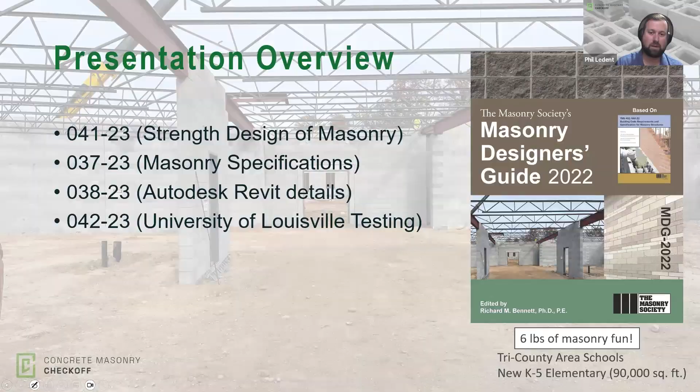I thought we'd go through the Region 3 proposals first, then talk about our national proposal, which was funding research at the University of Louisville. Starting with Region 3, I wanted to start with 0-41, our strength design of masonry proposal. The original scope included developing a new presentation specifically on strength design of masonry for the 2024 annual SEAMi conference, which is our Structural Engineers Association of Michigan. We also helped fund another presentation developed by Davenport Masonry, one of our larger mason contractors here in Michigan, on constructability of CMU projects, which they also gave at that conference.

After we got the ball rolling on this, the scope expanded. Through work with Mark Wilhelms, we were able to go down to the Structural Engineers Association of Kansas and Missouri, SEAKM, and give this presentation there, as well as at the Minnesota Structural Engineers Association. We have an upcoming one next week with the National Council of Structural Engineers Association, NCSEA, and I believe they have about 180 structural engineering companies already registered for that one next Wednesday. If you're interested, you can go to NCSEA's website and register.

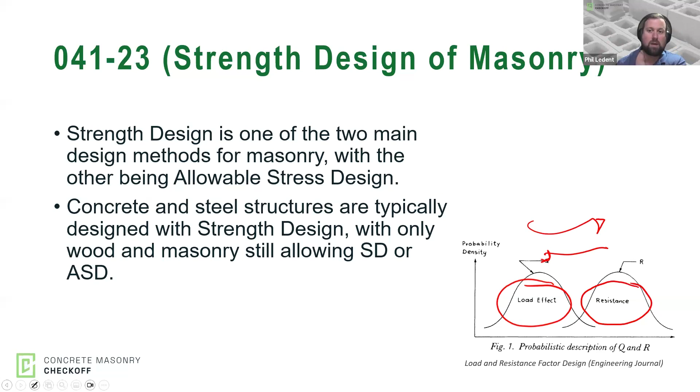Some of the engineering decisions being made are really causing masonry to be a lot more expensive than it needs to be. Unfortunately, the impact is we're seeing school districts, architects, and engineers that historically have used masonry turn to other building materials because of the perception that masonry is too expensive. So what we're really trying to do is educate people on how to efficiently design with masonry so we can be as cost competitive as we can be.

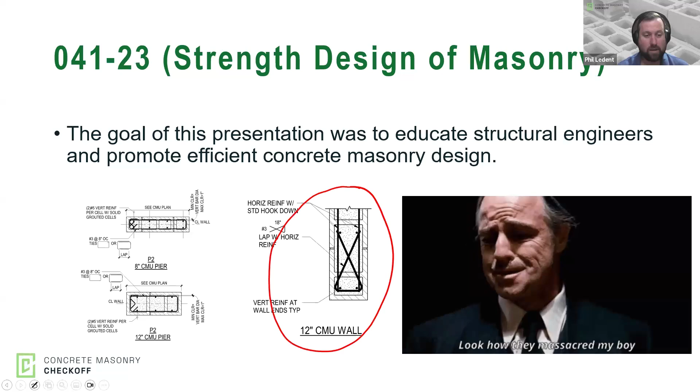Some of these details are more common in West Coast areas or areas that have a higher earthquake design load. But in Michigan and in most of our areas in Region 3, these aren't necessary and do nothing but add cost and schedule to the projects.

So we have to be careful about how we're designing and detailing masonry buildings in that area of the country. But Michigan, Minnesota, Wisconsin, Iowa - we're in a pretty low seismic zone up here, and we can take advantage of that to design economical masonry structures throughout most of our region.

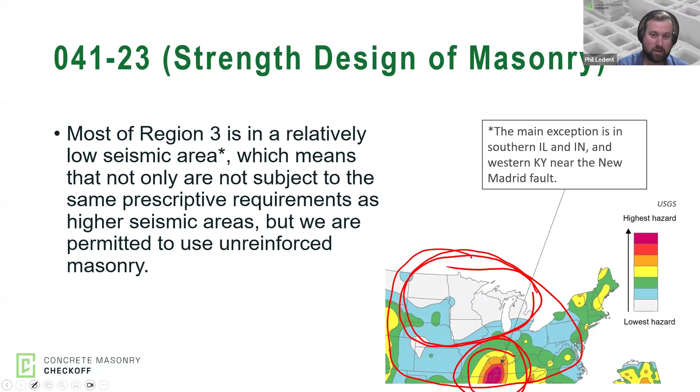That being said, we do get earthquakes in these areas. In my prior life, I had to actually look at some earthquake damage in Michigan, which was kind of odd - we had a 4.2 magnitude earthquake back in 2015 in Michigan.

I remember feeling the aftershock where I was in Lansing, from the original earthquake. This building was located right on top of where that epicenter was, and it was all unreinforced stacked bond fluted block built in the 1970s, so they had some earthquake damage on a building in Michigan.

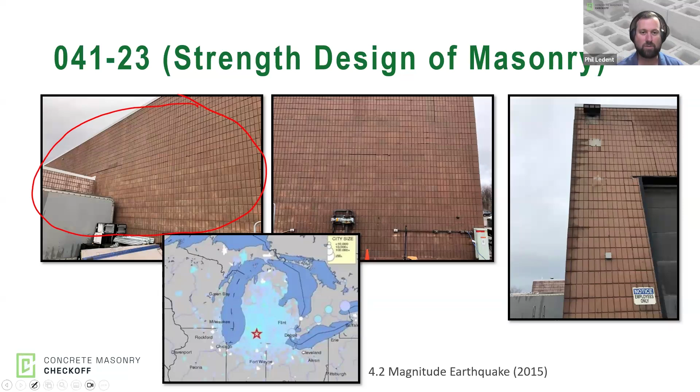So we do have to make sure that we're taking that into consideration in our design, but again, our risk and our accelerations are much, much lower.

Some of the things we covered - and again this is really brief because this is a full 1 hour presentation - we went through a lot of discussion and recommendations for masonry partition walls. This is an area we're really trying to target, especially through the MIM, because oftentimes when we look at square footage of walls on a project, partition walls are more than our exterior walls.

And so if we lose the partition walls in buildings, schools, things like that, that's a lot of block that we're losing on those projects.

So specifically in our lower seismic design categories - Michigan, Ohio, Indiana, those areas - we could use unreinforced masonry, or if we want to reinforce it, we can actually space reinforcement up to 10 feet on center. We tried to educate engineers on where they can use this maximum spacing, how high the walls can be, things like that.

We also tried to educate them on partition wall design. One problem we frequently see is we'll have a partition wall that maybe spans to our roof deck, built of concrete block, and we put these angles up to the roof deck, weld them, and then bolt them to the top of that wall.

Well, as soon as we do that, those are going to function as a shear wall. So we want to be very careful about what we're intending to be participating structurally and what we're intending to be just partition walls.

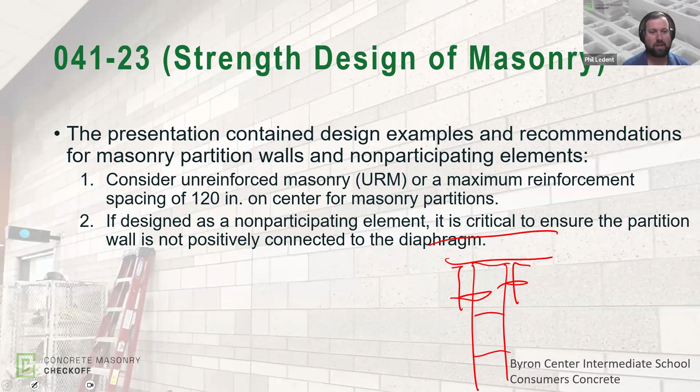We provided design tables to architects and engineers that told them the minimum prescriptive requirements depending on their seismic design category. In seismic design categories A and B, we don't have any minimum prescriptive reinforcement requirements, so unreinforced masonry can be used in those areas.

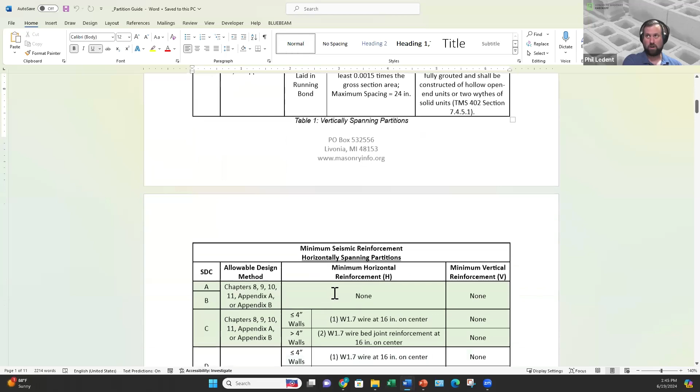Once we get into category C, we're looking at 10 foot on center reinforcement. We developed a full partition guide that we give out in lunch and learn presentations, going through all the code requirements, where these things come from, and general design practices.

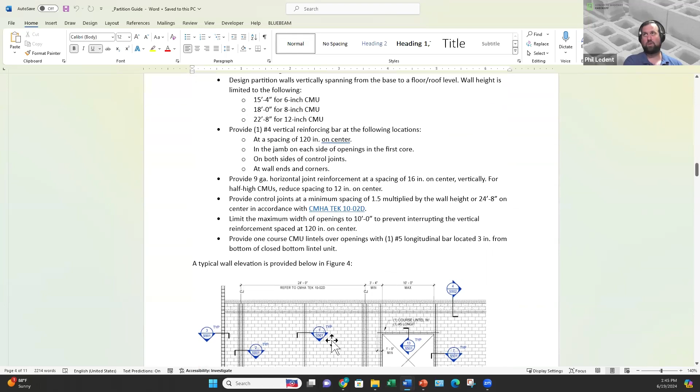We're trying to make design of partition walls as prescriptive as possible. The guide gives recommendations on wall heights, rebar spacing at 10 foot, and how far a one-course lintel can span. Anything we can do to make this more prescriptive, so people aren't spending a ton of fee and time designing it, helps us promote masonry for interior walls and partitions.

We educated them on that and gave tables for how high they can design with unreinforced masonry. For a normal weight block unit with type S masonry cement mortar, common here in Michigan, 8-inch block can span vertically about 16 feet, unreinforced and ungrouted.

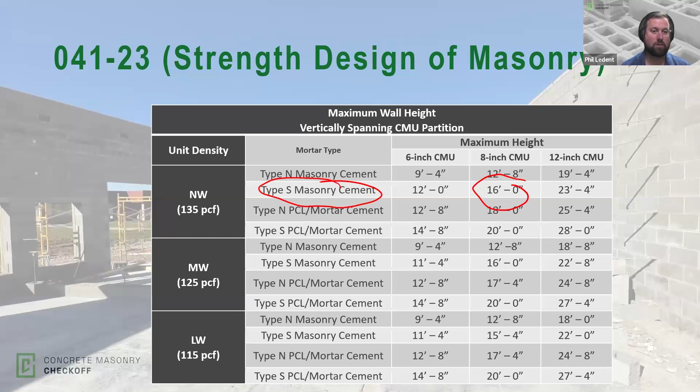For walls designed as interior partitions, mortar and unit density are important for anything spanning vertically. If we span our walls horizontally, which is common in school construction like janitor closets, we can span quite a bit further.

With type S masonry cement, an 8-inch block wall can go 20 feet horizontally. That's where it becomes very economical for us to use even 6-inch block for some of these partitions.

6 inches is attractive because if we already have 2x6 stud construction with half-inch gypsum sheathing on each side, we don't lose square footage by switching to a 6-inch concrete masonry unit. If we can make it work unreinforced or minimally reinforced, it helps us capture some of that market for interior walls and partitions.

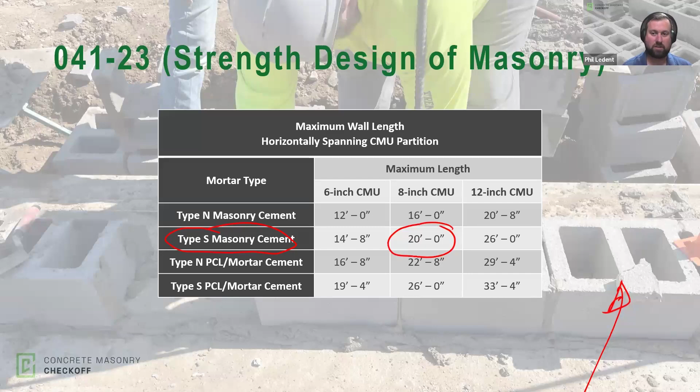Regarding that partition guide, which we'll have on our website, we used it on a project during the bidding phase and saved about $90,000 just on partition wall reinforcement. That's all we looked at was how to economize the partition walls in this school, I believe an elementary school. Because of the plan layout and everything, we saved $90,000 of taxpayer money and showed the school district how masonry can be economical.

So we've been using this, handing it out to architects and engineers, and more than anything, getting involved on their projects and answering calls about it.

For seismic design categories C and under, we have wall heights where as long as you fit these parameters, reinforcement at 10 foot on center, rebar on each side of control joints, jambs of openings, and so on, we end up saving a lot of grout, reinforcement, and labor on projects. As sustainability becomes more of a talking point, anywhere we save on grout, we're saving on cement and increasing the sustainability of that wall system.

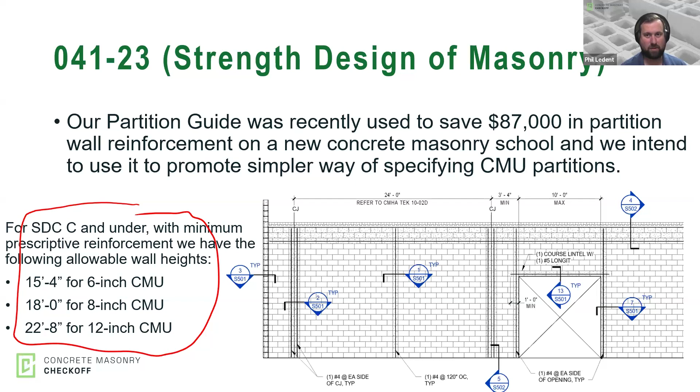We spent quite a bit of time talking about interior walls and partitions, and ways to space out reinforcement to make walls more economical. We also spent time on shear walls and exterior concrete masonry walls. In Michigan, in most of Region 3, other than areas near the New Madrid Fault, we're in seismic design categories A, B, and C.

Our maximum prescriptive limit of reinforcement is 10 foot on center. So anywhere we can push engineers to space that reinforcement out, not only does it help from a rebar and grout savings perspective, but also from a labor perspective.

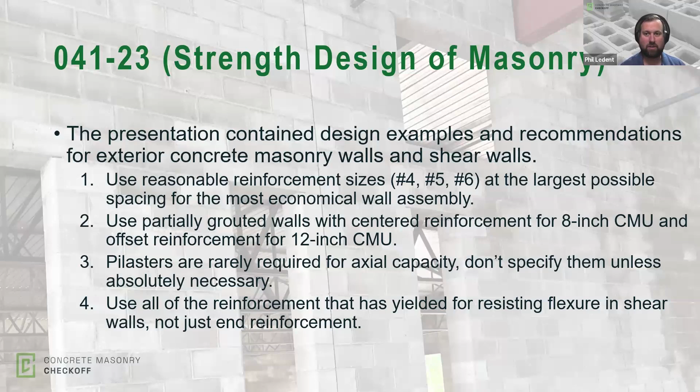One of the other reasons I wanted to present at CMHA, and this is something that's come up a lot on projects in the last 8 months or so, is engineers using what they call a pier, which isn't really defined in our TMS 402 anymore. But as soon as they call it a pier, they're designing it as a column. And a column made of masonry needs to have ties around it. So what they're doing is putting all this rebar in the concrete masonry wall and then having these lateral ties surround it.

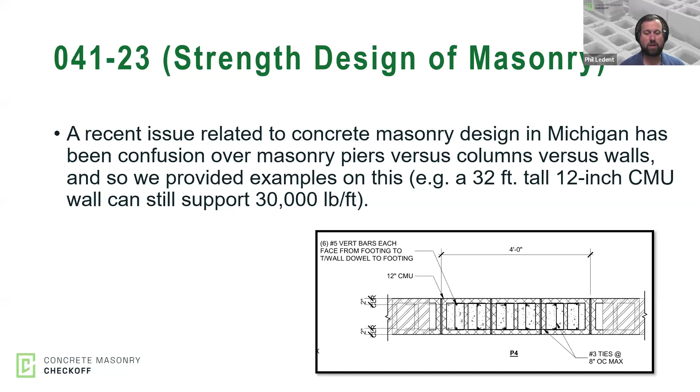But masonry, as a material, is very, very good in compression. So we talked about how we can eliminate these ties and save money on projects that way as well. To put some dollars and cents to it, we had a gymnasium that got built in Michigan about a year ago.

We were able to save $110,000 just by getting rid of ties in the walls. The engineer had put lateral ties under all their rebar, at every single joist bearing location. Working with them and the design team, we were able to show that we didn't need them. This was after the project had already been awarded, so that was the money the mason contractor ultimately gave back to the owner as a value engineering savings. It's great to save money on masonry projects, and we sure like doing it.

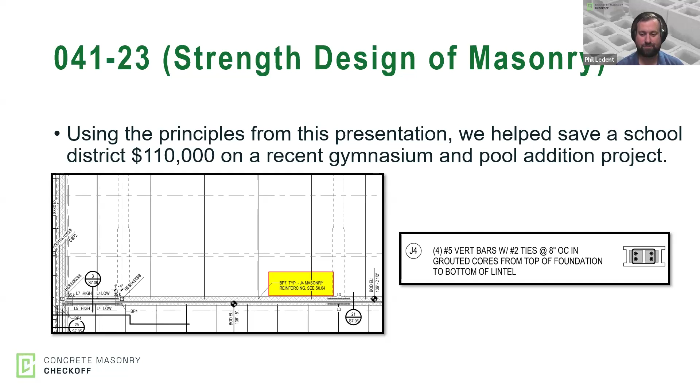But the problem is, if we keep allowing this stuff in design, there have been several gymnasiums in Michigan that have used alternate materials other than concrete masonry just because of that cost. It's a whole discussion on real versus perceived cost, but we want to make sure we're designing our walls as efficiently as we can to really promote how concrete masonry can be used economically on these projects.

Another thing we wanted to tackle: a lot of times on drawings in Michigan we always see number 5 bars at 48 inches on center. It's just kind of always been that way. We're trying to change that because, again, we're permitted to go up to 10 foot on center. We talked about that in our presentation and the implications of going further apart.

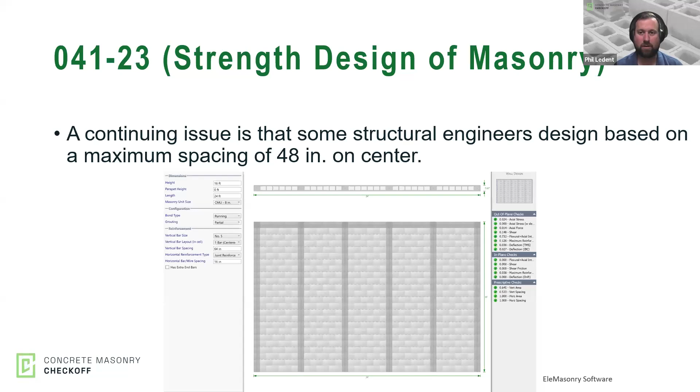This is a 16-foot tall wall we looked at with them, and we only needed a bar at 64 inches on center. So we were able to save grout space and rebar in every wall panel on that project. The last thing we covered was masonry lintels.

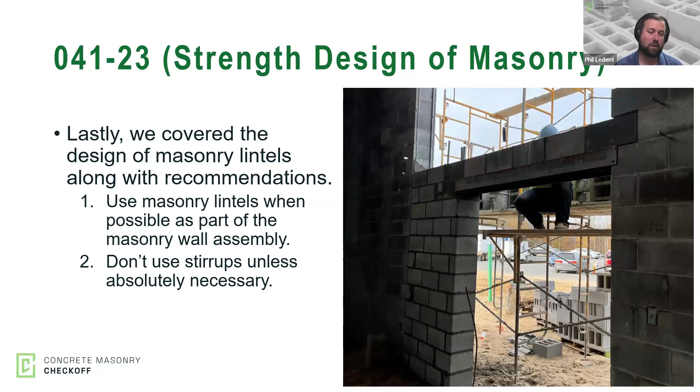Here we're trying to avoid stirrups and make sure people are using masonry lintels on their projects instead of steel lintels. Usually we deal with a lot of phone calls between the fall and the spring with steel lintels that are getting welded on both sides of an opening, and then we're dealing with drastic temperature changes in Michigan. So we get some cracking and things associated with that. We're really promoting masonry lintels, and if we're using masonry lintels, trying to avoid using stirrups.

So we boiled everything down to a very simple equation. You just take your design shear force and divide it by a number. These are the numbers for 6-inch, 8-inch, and 12-inch block, and this just gives you how deep that lintel needs to be so you don't need stirrups.

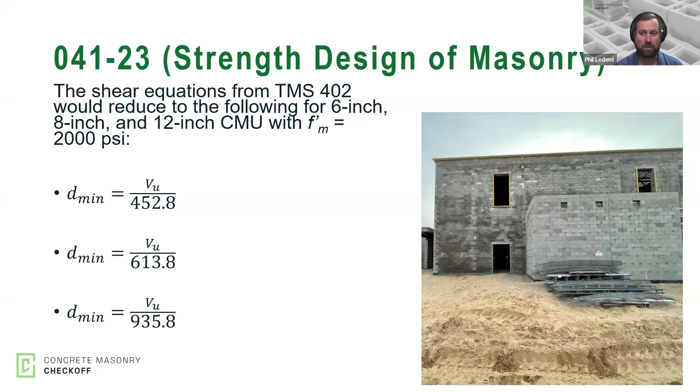It's a really quick, easy thing for engineers to check: first, if concrete masonry is practical, depending on whatever the height is above our opening. Maybe it's not, but in many cases it is. Once we know we have sufficient height, we can figure out how deep it needs to be so that we don't really need stirrups in it.

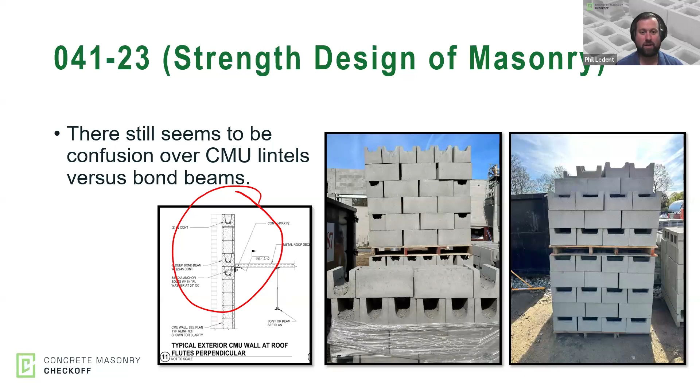One of the other takeaways I had from this was there seems to be massive confusion about CMU lintels versus bond beams, with that language being used interchangeably. In drawings, we often see this closed-bottom lintel unit being called a bond beam. Usually it's not an issue because a lot of our workforce and block producers are pretty educated on these things, but I have seen it be an issue on projects where they're intending for one thing, calling it something else, and it causing problems.

So to close this program out, I thought the presentation was really well received. I've had a few requests to come to offices and meet with them about this. Right around the time we were doing this, there was a wash bay facility in southwestern Michigan designed as a wood frame structure. We got involved and, using this presentation, met with an engineer and converted it to load bearing masonry. In this case, it was a cavity wall with a concrete masonry veneer, about a 300,000-ish masonry budget on the project that we were able to realize, solely because of this presentation and what we were able to do with it.

I'll take a real brief pause before we get to our other programs, since we have 3 more to get through. But any questions about this first program? I'd say we've completed all of our deliverables for this program. Our scope expanded to presenting at other structural engineering associations, and we got a lot of opportunities to take this forward as well. So I'll pause for 30 seconds or so.

On the rebar spacing for the wash bay job: we elected to use 8-inch block, and I believe it was 20 feet to bearing, so we were at 32 inches on center on that particular project. If we would have used 12-inch block, we could have spaced it out further, but that drove the labor cost up because of the weight of the 12-inch units. So to stick with an 8-inch nominal unit and a CMU veneer, it required rebar at 32 inches on center.

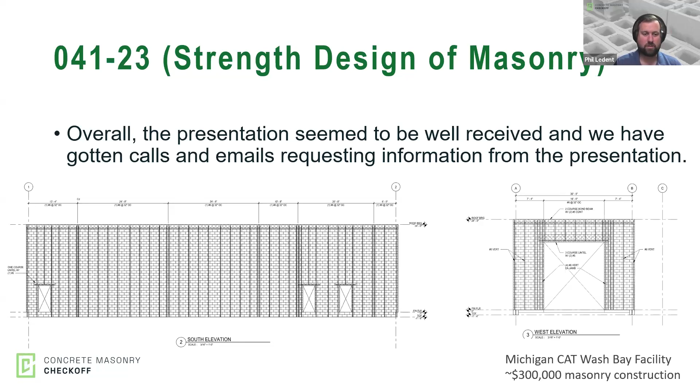No other questions in the chat box or Q&A, so we'll move on, but we can certainly come back to this if needed. The next one I wanted to talk about was our proposal 37-23, which covered masonry specifications.

The reason I put this proposal in is that we had a really good masonry spec developed through the MIM that we'd been handing out to architects and working with them. But it was like 50 pages long and covered the full gambit of masonry projects. So I wanted something specific to all of our different wall assemblies. The scope of this program involves developing 7 new pre-edited masonry specifications for our most common concrete masonry wall assemblies seen in Michigan and our region.

We partnered with Amy Baker, an architect in the Detroit area who specializes in specification writing. She went through and developed pre-edited masonry specifications for our most common concrete masonry wall assemblies. We have one for unheated buildings using single wythe CMU, one for single wythe CMU with insulation either on the inside face or elsewhere, and one for insulated single wythe CMU, which would encompass products like the High-R and High-RH from Concrete Products Group, specifically made to prescriptively comply with the energy code. Then we have several for our cavity wall systems.

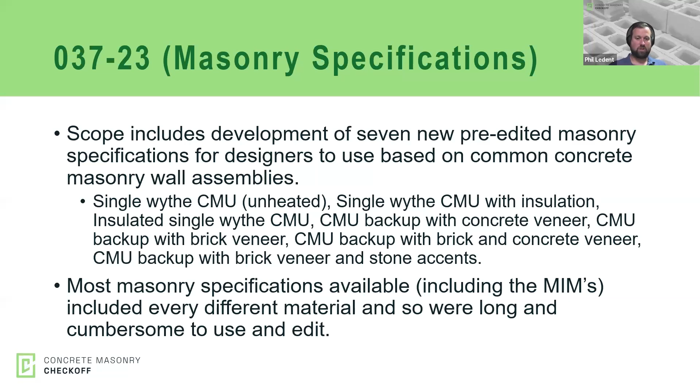Partnering with Amy Baker, we got a lot of input on these specifications, and we're still letting architects make all their material selections. But for instance, if they're designing a single wythe block building, we don't give them options for cavity because it doesn't exist in that building. I was working with an architect doing a lot of wastewater projects, pump stations, and things like that, and they were getting confused about things that weren't even in their wall assembly. So I gave them the specification for a single wythe block wall and walked through it with them, and now that's what they use on all their wastewater projects. We're just trying to make sure people are specifying our product correctly, so it gets built correctly.

We have been sharing these specs with architects throughout Michigan using lunch and learn presentations. They will eventually be uploaded to the MIM website as soon as I quit making excuses and just do it. They'll undergo review within the Concrete Masonry Checkoff, but they'll be available in some way to people to use eventually as well.

We've already seen these used on quite a few projects in Michigan. Just last week, I met with the architects that do all the prototype work for DFCU. They were looking at specs from Michigan all the way down through Florida for all those projects, which are all concrete masonry backup walls with a brick veneer. We were able to use these new specs and walk through it with them to make sure they're specifying things correctly on those as well.

Just a couple areas where we typically see issues in terms of specs. Pre-installation meetings and pre-construction conferences aren't happening as often as I would like or our contractors would like. This is really where we have an opportunity to clean things up before construction starts. So we give people an agenda for those. We really encourage them, especially in the post-COVID world, we have a lot of opportunities to do these virtually through Zoom or whatever. But that's where we can really catch a lot of things, so we have a lot of good language on that, as well as an agenda.

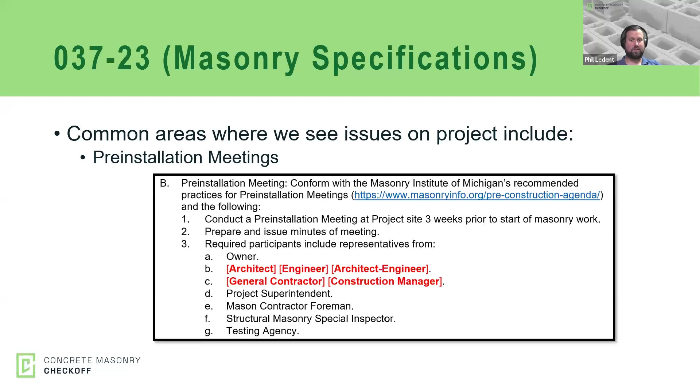We met with the construction manager, but the owner, Northern Michigan University, had a concern that the mason contractor was using inadequate materials. So they ended up pulling face shells off and I believe grouting solid the bottom two stories or so of this masonry shaft. But more than that, it just put a bad opinion in the owner's mind as far as concrete masonry.

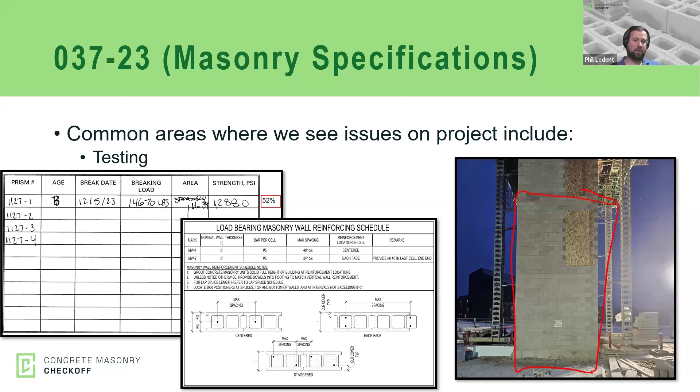And so we want to make sure testing is done right. We have a lot of language on that in our specification as far as what they're supposed to be doing.

Mock-ups as well, and those sorts of things. There is no workmanship standard for masonry. We have tolerances in our specification, but really a mock-up is there to protect the architect, the owner, and the contractor. We really spend a lot of time talking with architects and contractors about mock-ups, making sure they're included on projects, because really that's the only opportunity to address workmanship before construction.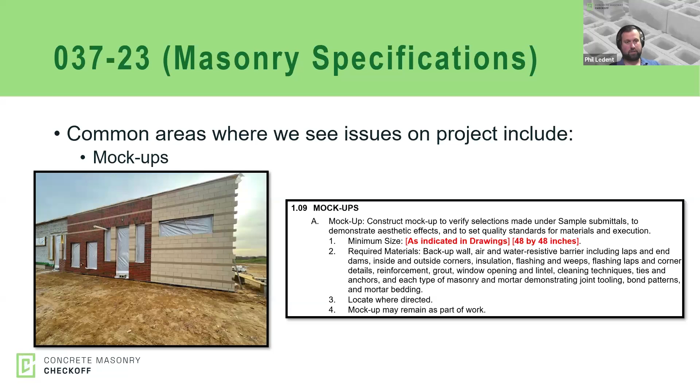I deal a lot with pictures that are taken after the building's completed, oftentimes from two inches away from the wall, with people having issues with joints, layout, things like that. But really a mock-up is the time where we can address that, and so we really talk about that throughout our specs.

Where it's really an issue, these two pictures show a school project with a burnished block unit. The problem is this wall is exposed on both sides. On the back side of this wall is a classroom, and this is sort of a janitor's closet type area. So when they laid the wall, they put their line on the classroom side, and on the other side of this wall, everything looks great.

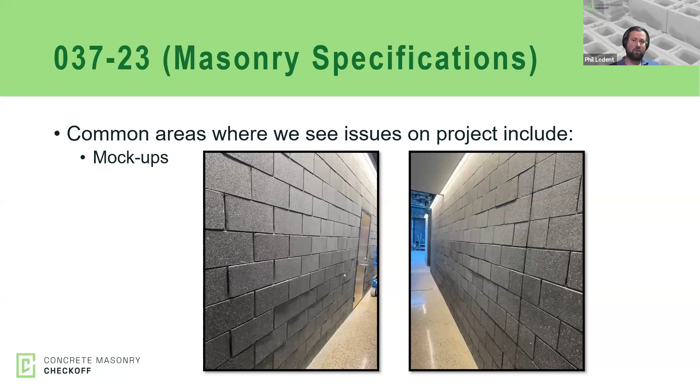But they put this wall washing downdraft lighting in this janitor closet area, and everything's in tolerance in these pictures, but how can we address this? So we spend a lot of time talking about mock-ups and things like that, just because we want to make sure to set those expectations early.

Fire rated assemblies. We do have some language in here about the equivalent thickness method. I actually have to jump on a call after this webinar with a fire marshal because they're raising issue that we don't have UL rated assemblies. So that is something we deal with often, mainly in Michigan and throughout most of our area. We demonstrate compliance with fire resistance ratings through our equivalent thickness method, which is the calculated procedure in our IBC.

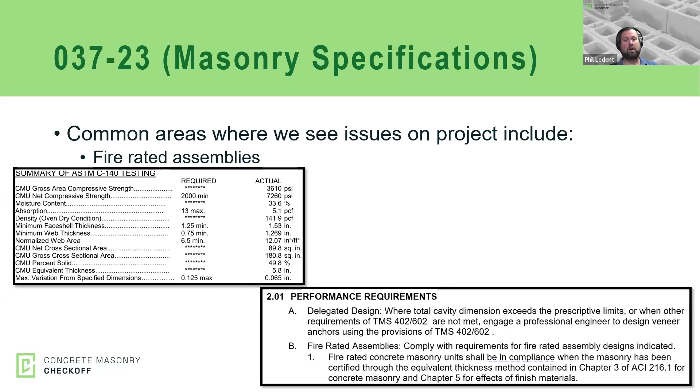And so we talk about that in our specifications, just because a lot of our producers haven't undergone UL testing, because they don't need to. And so we made sure to include that.

As far as CMU specifications, I'm often not surprised how many times I see things like type 1 moisture controlled block specified, things that haven't been around for 20 plus years. F prime M of 1500 PSI is another good example, but oftentimes these specs are recycled and you're not really taking a hard look at them. That's mainly why I wanted to put this program together, to make sure people are specifying concrete masonry correctly and designing it correctly.

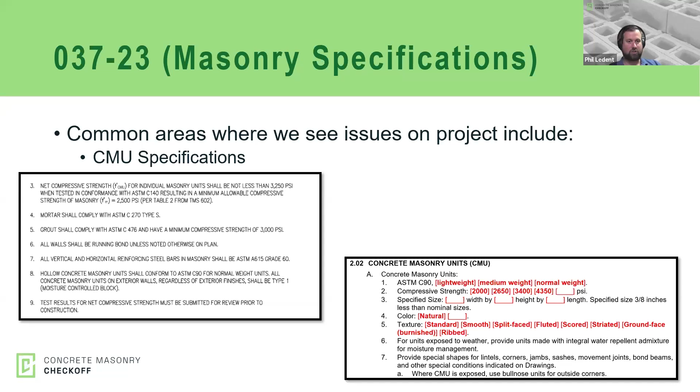So CMU specs definitely are included. Joint reinforcement continues to be an issue, at least in Michigan, with people specifying 3/16 inch joint reinforcement when it's not really necessary structurally, instead of 9-gauge reinforcement. And then we run into some issues with tolerances on our bed joints. Just things we run into a lot, we wanted to capture in these specifications.

The last thing we really wanted to highlight was control joints. As I shared earlier, Scott Walkowicz with Walkowicz Consulting Engineers presented on movement control as part of that CME conference. It's a note we see virtually on every project that says put joints at 1.5 times the wall height, or 20 foot on center, 25 foot on center, whatever that may be.

But I've been involved on quite a few jobs where maybe they had critical shear walls and weren't really great about communicating it on the drawings. And a contractor put a control joint there because that's what we've always done. If we're not clear in our drawings and specs about where this stuff goes, it really leads to issues down the road.

So in our specs, it basically says locate control joints where they're shown in the drawings, and if they're not shown, request clarification from the architect or engineer. This is an area where contractors a lot of times take that responsibility, but it's not always their responsibility to take. It's more of a design decision. And yeah, there are no more dangerous words than 'we've always done it that way.'

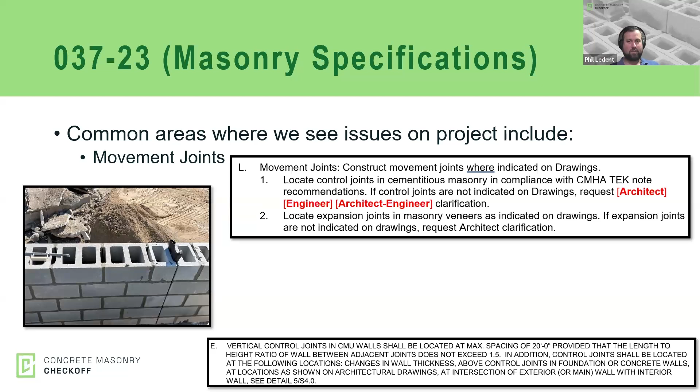And so we'll work with architects on that, mainly through Zoom. We've had a lot of virtual meetings with architects where we can actually walk through it with them. That's nice because then you can pull up all your references online and show them why we're recommending certain things. But these are done, I need to get them on our website, which I should do.

I'll get those on our website this week, hopefully. They've already been used on quite a few projects and the feedback's been good from architects. This is something where we can assist them virtually or in person.

I'd suggested John Lorando in our region as well. This seemed to me like a really good opportunity, maybe to engage a mason contractor, an architect, and a block producer to go through a spec and in 15 minutes or so just discuss what matters. Why does it matter if you specify this density? What matters, what doesn't, how does it affect cost? It seemed like a really good way we could communicate best practices as far as concrete masonry to specifiers.

With that, I'll take another 30, 40 seconds. Any questions about this particular program related to masonry specifications, I'd be happy to address now. I'll just monitor the chat box for a minute here. No questions, that's either a really good thing or a really bad thing.

All right, moving on. Mark mentioned dealing with testing. Yeah, just as a quick aside, since we're doing all right on time, we actually partnered with one of our good testing companies here in Michigan, and we did a big grout workshop 27 days ago.

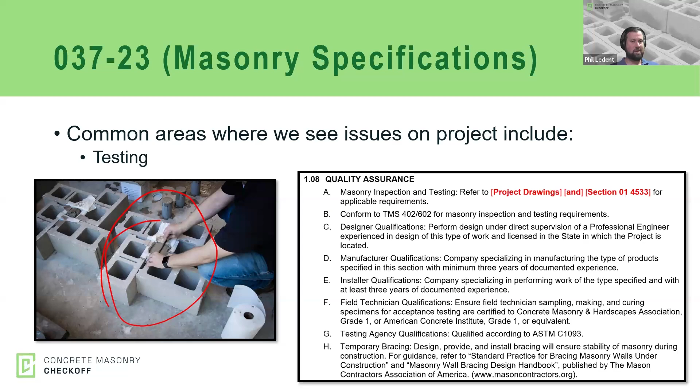And we got pictures and videos and content on all of that. So we're going to develop a one-page sheet on grout testing and a one-page sheet on mortar testing, and distribute that to not only contractors, but also construction managers and general contractors, since oftentimes they're the ones that deal with these issues. We want to make sure everyone puts it in the job trailer on the board, because testing things incorrectly can really derail projects. We should have all that content tomorrow, and we'll be developing that through the Masonry Institute of Michigan. If you want that, reach out and I can provide it.

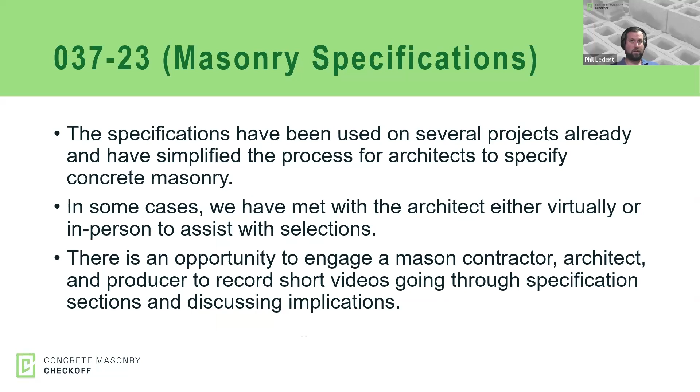This goes through Autodesk Revit details. What we were seeking to achieve with this program was converting a lot of the details we already had available through the Masonry Institute into Revit format. The issue is most of our masonry details were in AutoCAD and PDF format, some in SketchUp, but a lot of our architects and engineers are predominantly using Revit for their construction documents.

Our details are being developed by Adam Hutchinson with the Northwest Concrete Masonry Association. We also got additional funding for this effort from the Laborers Union Local 499 here in Michigan and the Masonry Institute of St. Louis.

My whole goal with this program was things that occur on every project. Every job has specifications, every job has standard details. So why not give them a standard detail for a concrete masonry control joint that they can just drag and drop into their drawings without converting AutoCAD and all those other things? If we have different line types, that just adds data to their model and slows it down. My goal was to develop standard details using Revit standard line types and fonts. Adam's done a really good job with this, so kudos to him.

I just met with him last week, I think, so we're almost done with this. But even things as simple as special inspection schedules - they're in our code, they're in our specification, but how do people actually put them on their drawings? So we developed tables for all this.

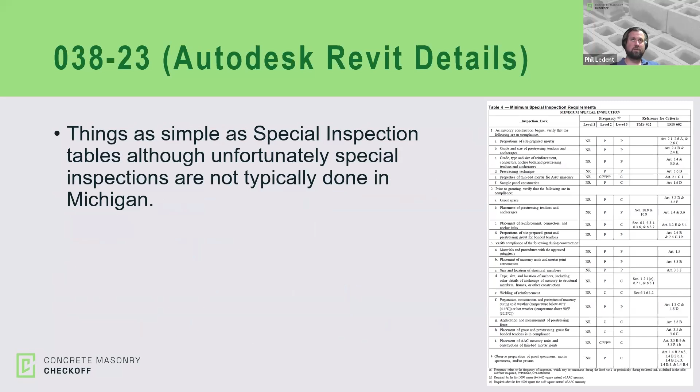I wish special inspections got done in Michigan. Unfortunately, they're not generally done. But providing these tools helps people accurately specify and design with concrete masonry.

Control joints - yeah, the nice part about doing this as well is then we can link them to other information. Back when I had started doing this before, I didn't have time to continue, we were putting links to the CMHA TEK notes.

So here's a detail for a typical Michigan control joint. Hey, Mr. Engineer or Mrs. Engineer, go to this TEK note - this is where it'll tell you the fire resistance rating, this tells you where they go. So these details really give us an opportunity not only for people to design with things correctly, but also to educate them on why we're using this detail.

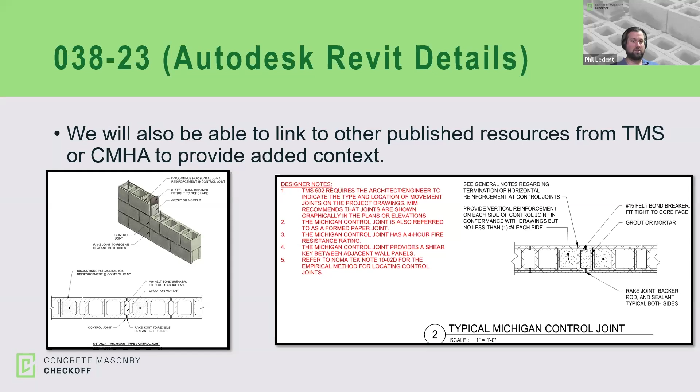That's what we're looking to do with these Revit details - just make things easier for engineers so we don't constantly get the same details that have been used for the last 30 years. I'll share personally, one of my old firms, we still had sticky backs - essentially an 8.5 by 11 sheet of paper with a detail on it. We'd put double-sided tape on it, put it on our design drawings, and scan it in. Engineers and architects don't have time to constantly be reinventing this stuff, so as an industry, I think it's important for us to provide it to them.

As far as where rebar goes - is it singly reinforced, doubly reinforced? If it's doubly reinforced, where does the rebar go? We can provide all that information to engineers to make their job easier to specify concrete masonry.

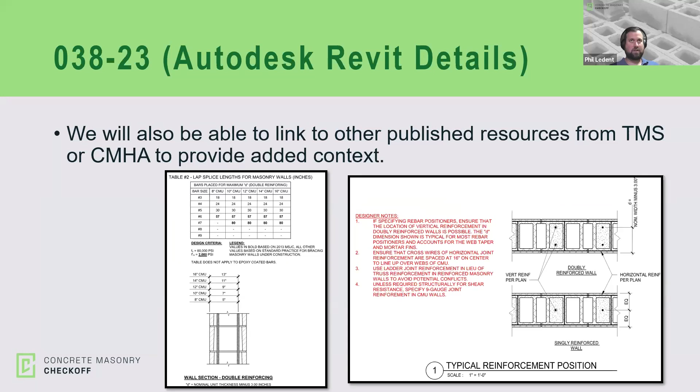This is a big one in Michigan, and much of the Midwest, where if we have an intersecting wall, oftentimes we'd rather the contractor install the mesh galvanized hardware cloth at that wall intersection instead of the strap anchors everyone's used to seeing. Not only are these a safety issue, but it's just adding cost to our walls. If we're not designing them as flanged shear walls, then we really shouldn't be specifying this anyway. Yet this is a detail that creeps up on virtually every job because there's just not thought put into it.

So this program was developed to create this content to push out to engineers, to make it easier for them to specify concrete masonry. All this stuff is going to be at least on the MIM website. We'll have to review it with Concrete Masonry Checkoff to see how we disseminate it. But once it's developed, reach out to me. I can certainly provide it. So that's that program in a nutshell.

That one's almost done. Adam's on the call, I just saw he put a comment in the chat box. But I think I'm excited about this. I think a lot of our engineers are happy that someone's willing to do this for them, because they just don't have time to update these on every project.

Any questions about Revit details? I guess before we get to our last program.

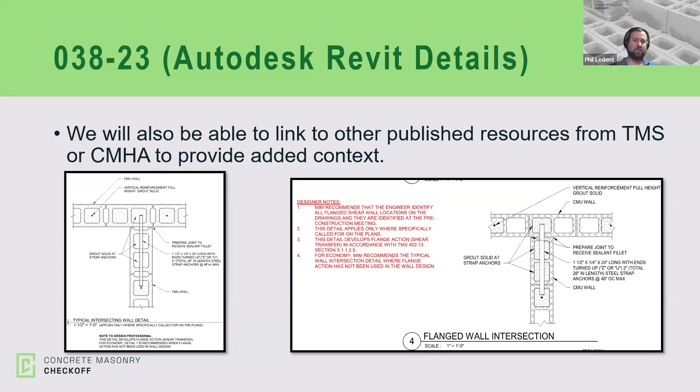All right, with that we'll cover our last program. We've got about 15 minutes left together, so I'll cover that and then we can address any questions at the end that haven't been previously answered throughout today's webinar. So the last one was actually a national proposal. The prior three were regional proposals. And this national proposal's scope included assisting with some funding research.

This was for research done down at the University of Louisville related to internal bracing of masonry walls, conducted by Mr. Mark McGinley. The MIM partnered with the International Masonry Institute, the IMI, to go out and solicit funding to get this done. We've been trying to get this done since, I believe, 2010.

We got the bulk of the funding through the Block Foundation, the Masonry Institute of Iowa, Bricklayers and Allied Craft Workers Local 2 of Michigan, Wire-Bond, the Masonry Institute of St. Louis, the Mason Contractors Association, the Michigan Mason Contractors Association, the Mason Contractors Association of America, and the Arizona Masonry Council. So I wanted to thank them, because without them we wouldn't have been able to get this done. So a special thank you to them.

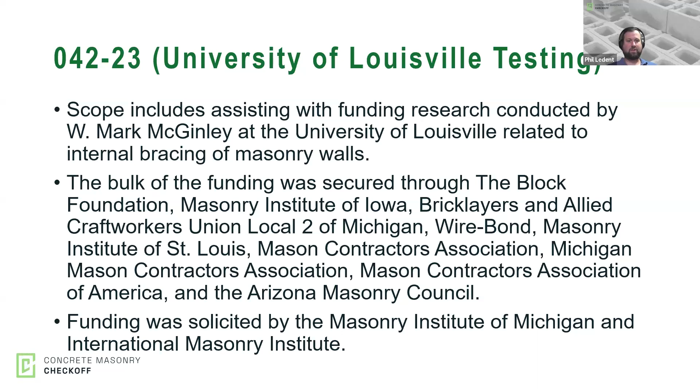We've got to do something about all these acronyms within the masonry industry. But no, thank you to them, we were able to get it done. The research actually concluded last month, and on Monday of this week I just got the final draft report from Mark. So that's all getting finalized now as well.

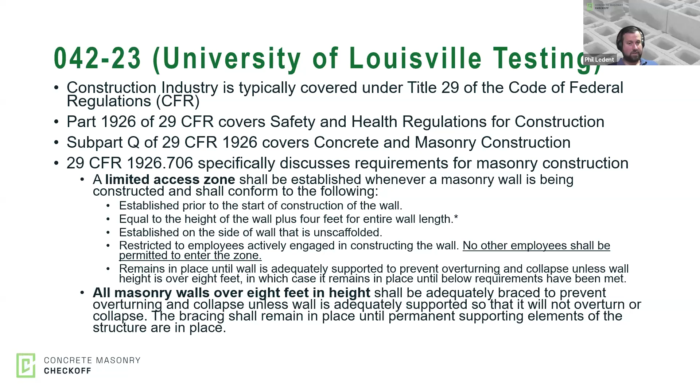But it all relates to internal wall bracing, so I just have a couple brief slides on what internal wall bracing is and why it's important. Wall bracing is actually an OSHA requirement, and federally OSHA says anything over 8 foot has to be adequately braced to prevent overturning and collapse in terms of concrete masonry construction. It doesn't tell us how to brace it, just tells us it needs to be braced if it's over 8 foot in height. And so the Mason Contractors Association of America came up with this council for masonry wall bracing.

They developed a standard practice for bracing masonry walls under construction, which was last updated in December of 2012. What they came up with is bracing walls for a wind speed of 40 miles an hour. If the wind gets to 35 miles an hour, that's where we evacuate people away from the wall and out of the restricted zone, because masonry has a lot of very good properties, but it's a very, very heavy material that you don't want falling on you.

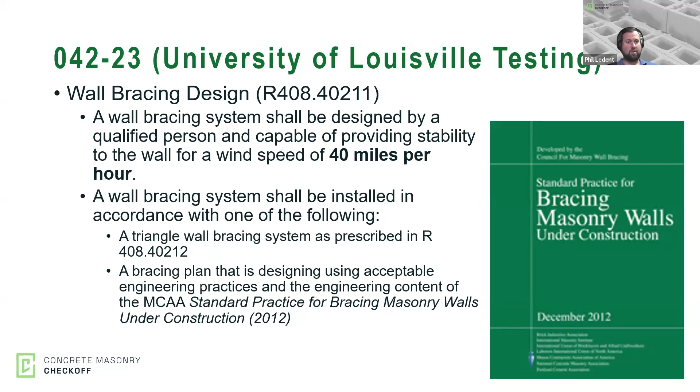So all these provisions are there to promote job site safety. And in the MCAA standard practice, it talks about coming up with a bracing plan that is designed using acceptable engineering practices. What we see done a lot throughout our region is what we'll call internal wall bracing, and that's where we're using the grout and the rebar already in the wall to resist some of those wind loads that we see during construction.

This is a major advantage to concrete masonry as a building material, because if we're using other systems, like a tilt-up wall panel for example, oftentimes those systems rely on external braces, which are not only costly but affect logistics on a job site, just with the square footage and area they take up. With masonry, oftentimes, if we're designing it for our full occupancy wind load, we have enough reinforcement and grout in that wall that we can resist that 40-mile-an-hour wind load during our construction period.

The caveat is, the MCAA standard practice was from 2012, and back then, after 24 hours, we needed a splice length of 0.002 times our bar diameter times our stress in our reinforcement. And prior to that time, that was 24,000 PSI.

That equation mainly boiled down to 48 bar diameters, 0.002 times our 24,000. That's kind of a number that we've used for internal wall bracing in Michigan and throughout our region.

The issue is, if we calculate our lap splices in accordance with our TMS 402 masonry code, a number 5 bar centered in an 8-inch block wall comes out to 20 inches. Using our standard practice of 48 bar diameters, which for bars smaller than a number 8 just becomes 6 times our bar size, it's 30 inches.

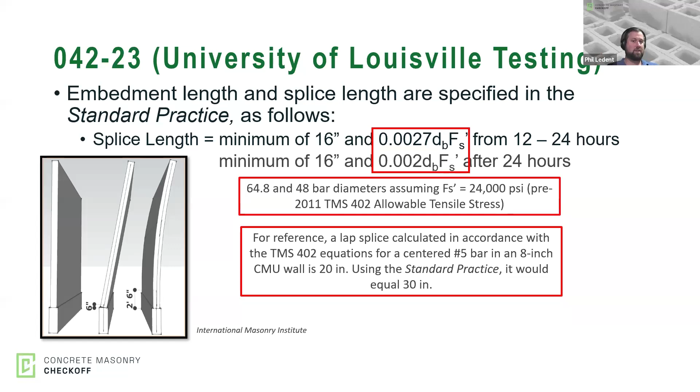This research was mainly to harmonize these provisions and not have a longer lap splice required than what was necessary. If we don't need to be lifting block up and over lap splices further than we need to, there's obviously a labor component with that, especially in areas that don't have open end or double open end units. That's what this research was mainly aimed at doing.

In terms of internal wall bracing, we already talked about the advantages. It doesn't take up space with external braces, and has that job site safety benefit. We don't need dead men, augers, those sorts of things. It's a real advantage to masonry construction that we don't need those, and can rely on what's already out there to resist wind loads during construction.

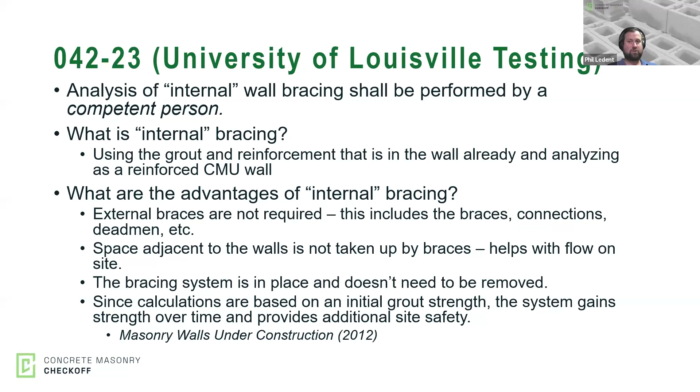In Michigan, we're lucky enough to have Todd Dailey here, who does the bulk of our wall bracing design for mason contractors. I'll give him a shameless plug, but he has good design tables on his website. If we look at an 8-inch block wall with rebar at 4 foot on center, it can be internally braced up to about 18 foot - a really good opportunity to leverage what's already been designed and avoid using external braces or making our wall system more expensive than it needs to be.

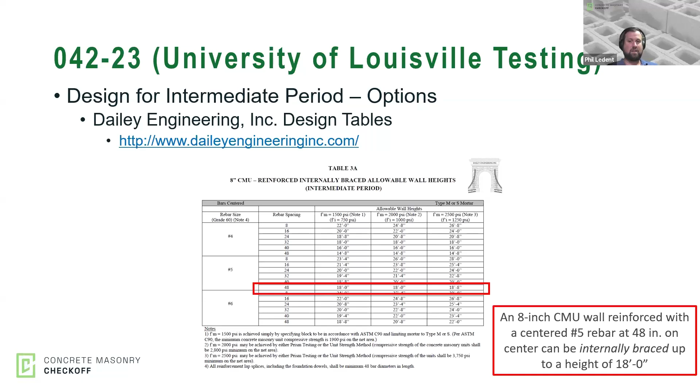All of our contractors use internal wall bracing for the most part, unless we get into a condition where we can't use it.

This is a school that's getting built by my house. On this particular project at their gym walls, I forget what that wall height was, but Todd had to work with the engineer and the contractor to add a little bit more reinforcement in the bottom 4 foot or so of the wall to resist wind loads during construction, because the engineer had spaced the bracing out as far as they could, which helped reduce our cost as a masonry material, but we had to add a little more reinforcement there as well.

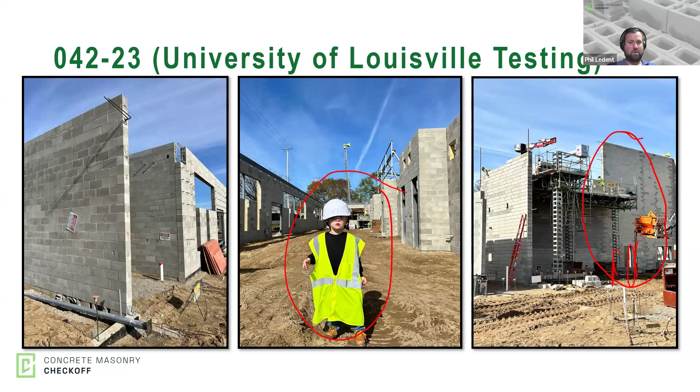This is my 3-year-old. I drag him around and talk to him nonstop about masonry. So he's either going to be an engineer, a home brewer, or I don't know, something else, but I'm pushing for those two things.

All right, so the testing was done. They built 6 foot tall masonry wall panels down in Louisville, with assistance from the BAC down there, and they basically hooked up a hydraulic ram to it and pushed the wall over at different time intervals after grouting. You can see that in action here.

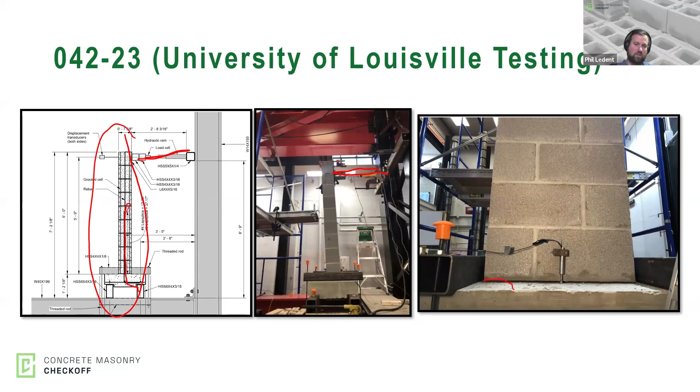It's pushing on that, loading this bar in flexural tension instead of direct tension, which is what the prior testing was done using. Then they looked at how it reacted, and most of the failures were in the bed joints, as we can see.

The draft findings showed that 12 hours after grouting, if we used a high early cement in our grout, we're developing enough strength to yield that rebar. At 24 hours, a standard grout mix seemed to be getting us where we needed to be.

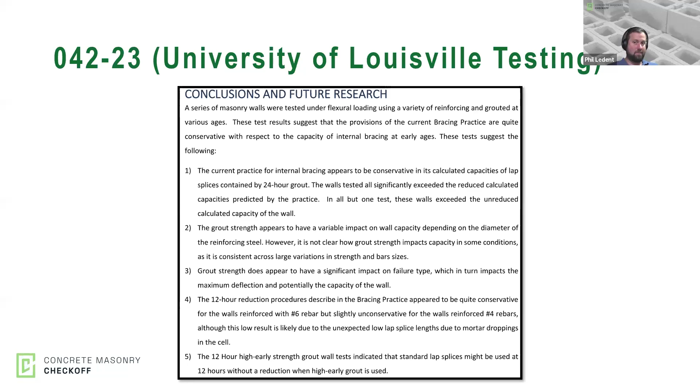I think there's an opportunity here to meet with MCAA and look at the standard practice, to see if we can revise it based on this research to help limit those lap splices in our walls. There's a huge labor component to it, and the research, like I said, is completed.

The final draft report was submitted on Monday. Based on those results, we're going to be coordinating with MCAA and discussing how we can update the standard practice and encourage contractors to use those shorter lap splices while still maintaining safety during construction. That way we don't have two different values for lap splices between our code and our standard practice.

Again, the draft report is done as of Monday, so this program's virtually completed as well. We have some future steps as far as coordination and updating some of our standard practice information.

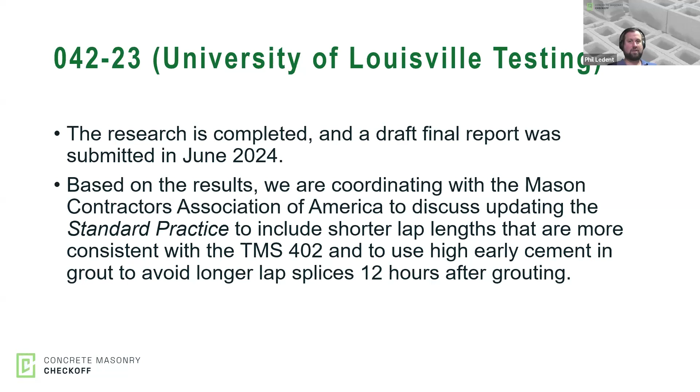And with that, that's my 4 programs. We've got 8 minutes left together, and I'll address any questions you have on these 4 programs or anything else you want to talk about. I'm here for you. Thank you to the Concrete Masonry Checkoff board for ultimately approving these and helping out with the Department of Commerce.

I think there's a lot of opportunity with these programs to really drive some market share. These programs were pretty low cost. I'm a frugal person, just the way I was raised, so we tried to do as much as we could with as little money as we needed. But we're already seeing the results, and we are tracking how much money we're able to save on projects and jobs we're able to convert to concrete masonry. We're tracking that as well, just to hopefully build an inventory of things we can do to help increase our market share.

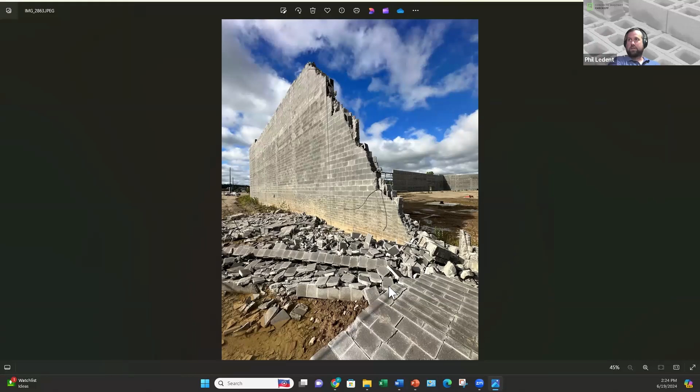I will comment on Demetrios's question real quick, if I may. So Demetrios is talking about the importance of bracing during construction. In Michigan, we have had several tornadoes in the last year. I actually experienced one firsthand with my 2-year-old at the time, which wasn't a great experience. But this was a project that was constructed, and then there was a lawsuit, so it mainly sat there for 8 months. It was a 12-inch block project, and this took straight line winds of 100-plus miles an hour. We can see that they grouted it, so that's good. But the interesting part with wind and tornado damage is failure modes.

Some of the rebar actually pulled out, even though they had enough lap splice length on this project. But some of it we found didn't even yield or neck — it actually ruptured. Essentially, the wind hit this wall with such force that it took it from zero stress to its ultimate rupture strength. So, yeah, wind is a scary, scary thing.

I will share that in Michigan, we are in the ICC 500 map as far as providing tornado shelters for students in K through 12, but our legislature took it out in the 2015 Michigan Building Code. We're currently adopting the 2021 Michigan Building Code, and the language on their website has that being taken out again. So we're not requiring schools in Michigan to have storm shelters. As a dad, that's very alarming to me. Wind is a scary thing, Demetrios, so I'm there with you. But unfortunately, our legislature doesn't view it as such in Michigan.

We'll keep working on it, right? Yeah, we have been lobbying the government through the Masonry Institute of Michigan and through other avenues to try to make sure that language is included. But we've got a lot of work to do in terms of codes and standards.